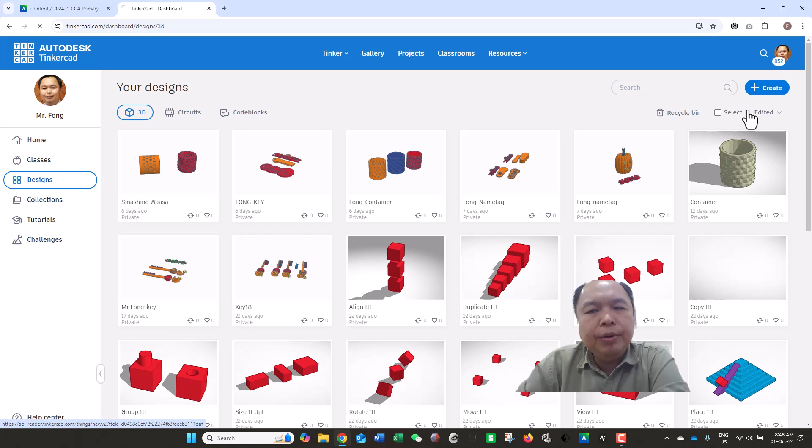Okay, so go to design, create a new 3D design. Now you can just wait for a while. I will show you with a square box. But since we are creating a box, you can use any shape you like.

For example, you can use a cylinder, or this polygon shape. Some of you may like to use a heart shape, and some of you can even create your own shape, expecting something like a flower shape, or some very interesting shape created by combining different objects.

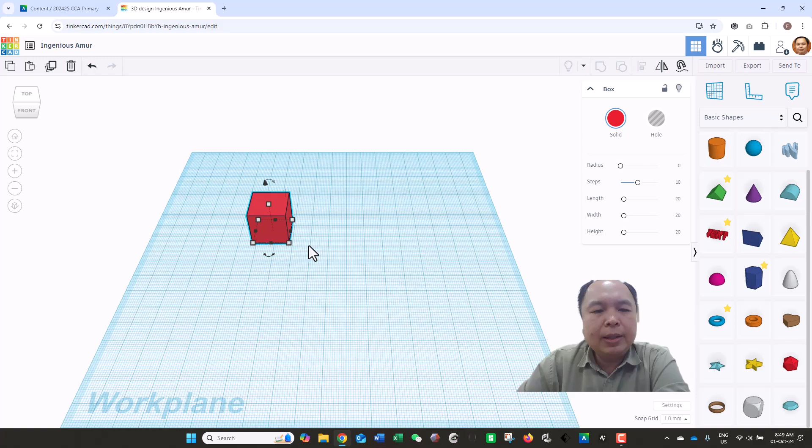Okay, how do we start? Again, you need to use shift in order to maintain the aspect ratio. You can see if you hold down the shift key, whenever you drag, the size of the box will remain the same. That means if it's 55 for all the corners, all the X, Y, and Z — you can see even the Z is also 55.

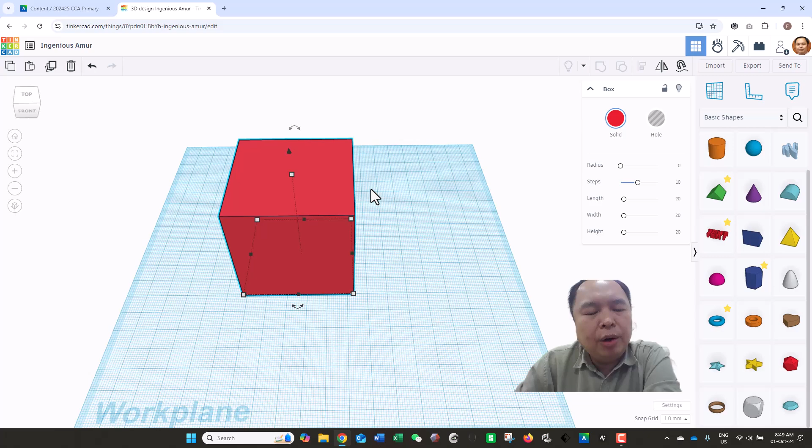I will not print a very big box for you. We'll create a small box, probably good enough to hold some coins. So you prepare maybe 60 mm, which is about 6 cm — a very small box. The objective is to learn alignment and to create a simple cover. So 55, this is fine.

You need to create an extra copy of this one because I need an extra copy for the cover. So in this case, Control D, duplicate — D for donkey. Then you create an exact duplication of this box, then lower it down to maybe about 5 or 6 mm, which is for the cover.

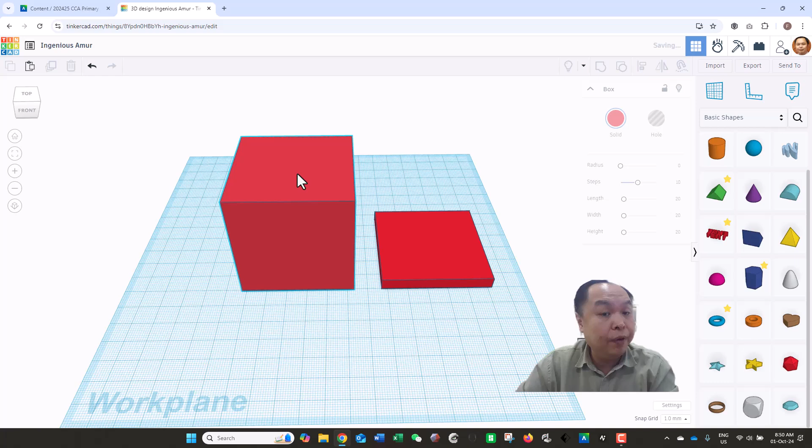Okay, for the cover. Now you select this box again, Control D if you're using a PC, Command D if you're using a Mac. Now hold down the shift key again. I want you to lower it down a little bit, maybe until 51 or 50. Let's say 50. Release, and then make it higher by holding down the fifth white color dot, which represents the height, the Z.

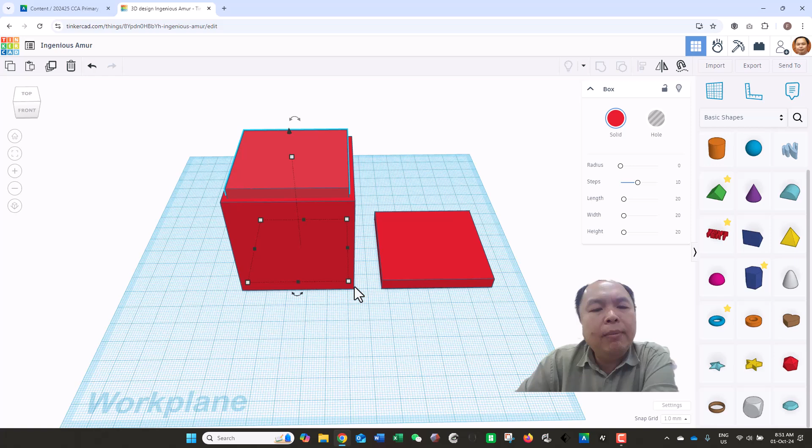After that, you need to move this up. When you move this up using the black dot, you'll notice at the bottom it shows you the gap between the work plane and your box. So 3 mm is good enough. If you want the box to be thicker, you can make it up to 4 — in case you want to put your name at the bottom. But I would suggest, why not put your name at the side?

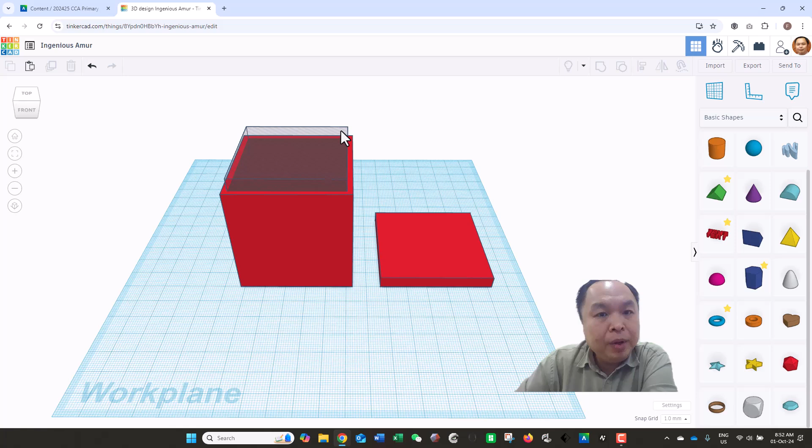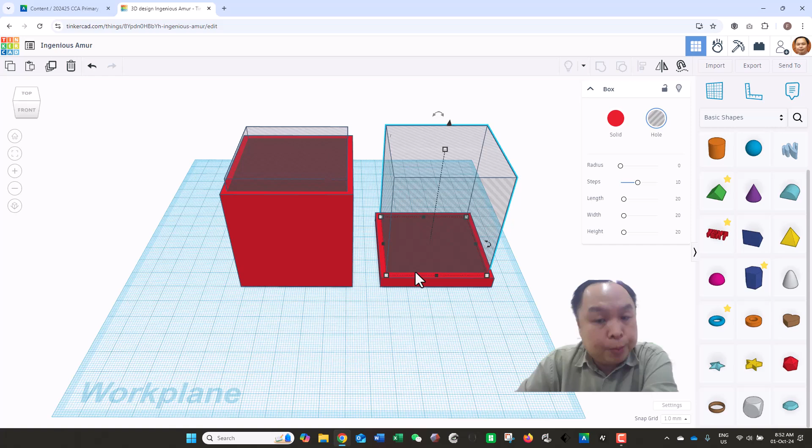Select all — now you can see we are ready to cut this box. But before that, you need to make a copy of this, the center — I would call this the hole box. Control D or Command D, bring it out. This is for you to create the gap inside your cover so that the cover can close properly. Okay, so change it back to solid.

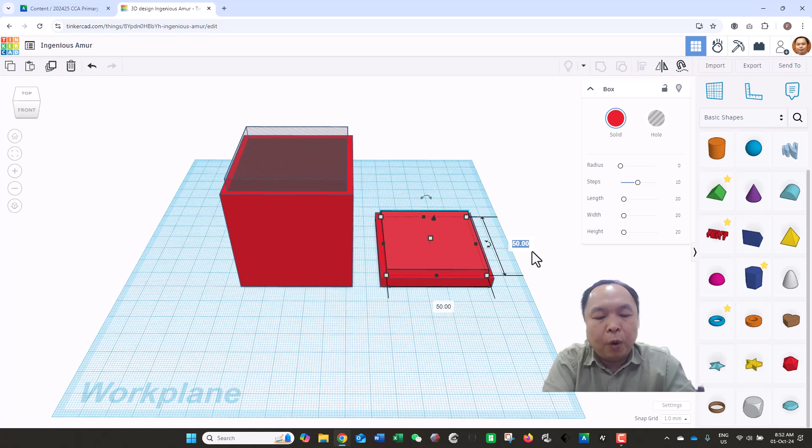Then you can adjust back a little bit — 3 or 4 mm is good enough. But you have to adjust this a little bit. First, if you just make it like this without making it smaller, your box will be very tight — it's very hard to close. So let's look at it: 50, 50, 50. Try to make it 2 mm lower by making it 48. You type 48 here, and 48 here. So it's 2 mm — that means each side you reduce by 1 mm.

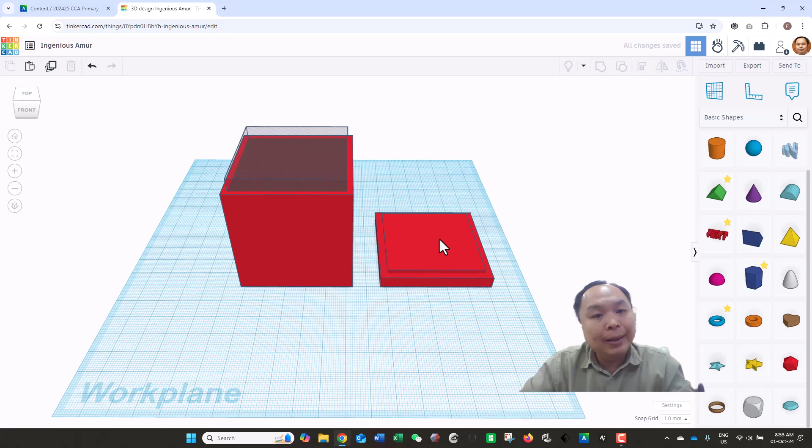Now you select these two, click alignment, center for both sides. Okay, now the cover has been done, and combine this by clicking merge. Do you notice one thing? Now the box is done. Perfect, perfect. So this is how.

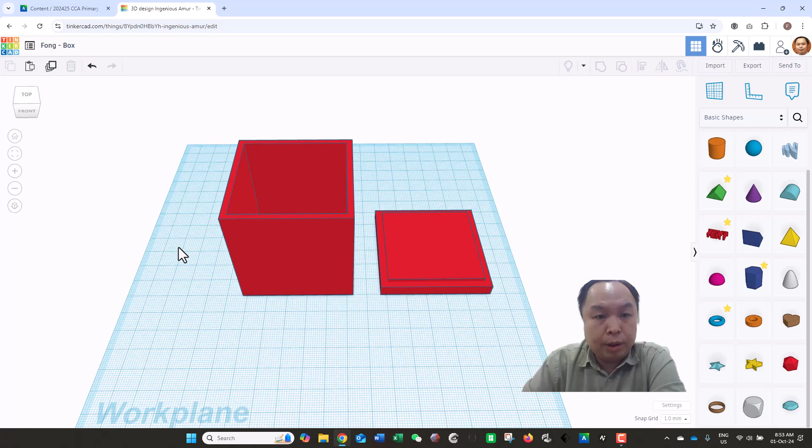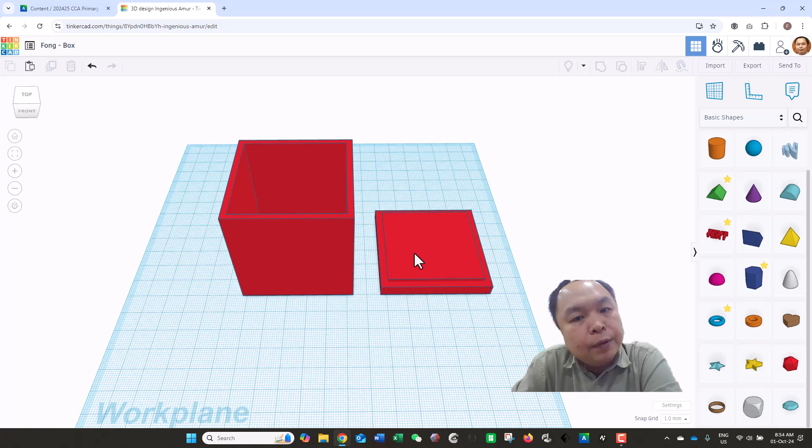Oh, before I forget, type in the name 'box.' When you submit your work, you can choose to submit in two files. Select this file, click export, so you export the selected shape. The second time you export, it will add a bracket one behind — so you can export first time and second time. Or you can also choose to export both at the same time, everything in the design as one STL file. So I will receive this submission in one file. But for good practice, I suggest you submit in two different files — one for the cover, one for the box itself. Okay, this is the simple version for everyone to try on.

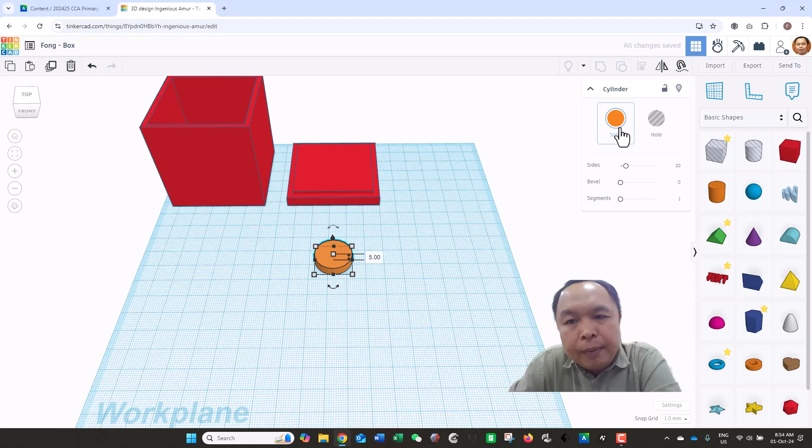And if you want a better idea, let me give you one. You can create something like this — maybe 5 mm, round, always push to the end. Now you click this one, increase the size, reduce a little bit, 4 or 5 mm. It doesn't matter how much — around 5 or 6 is also fine.

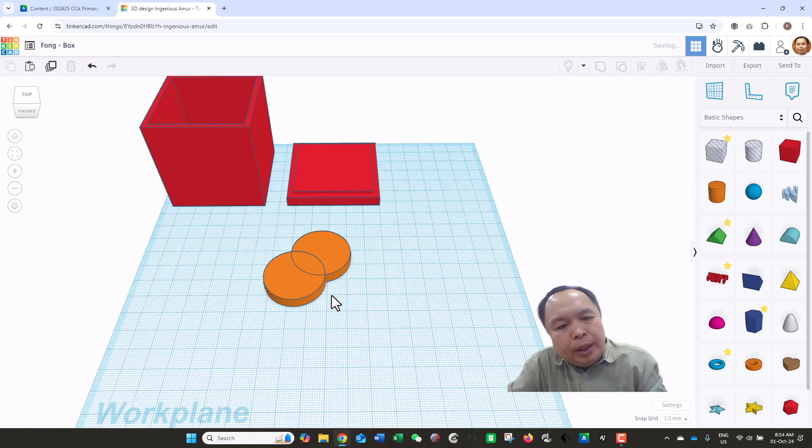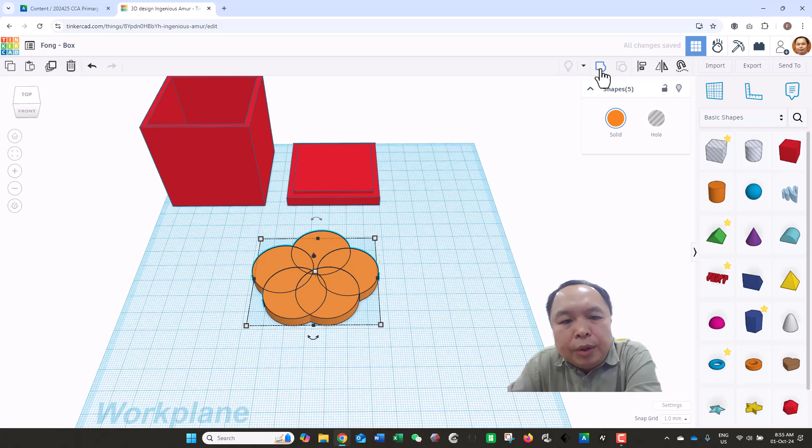Command D. Okay, and then Command D. Once you make a mistake, just press Ctrl Z. Command D again, then you can arrange something like this. Another Command D. Okay, so look at this shape after you merge together — you see it's like a flower, so you can align properly so that it looks nicer.

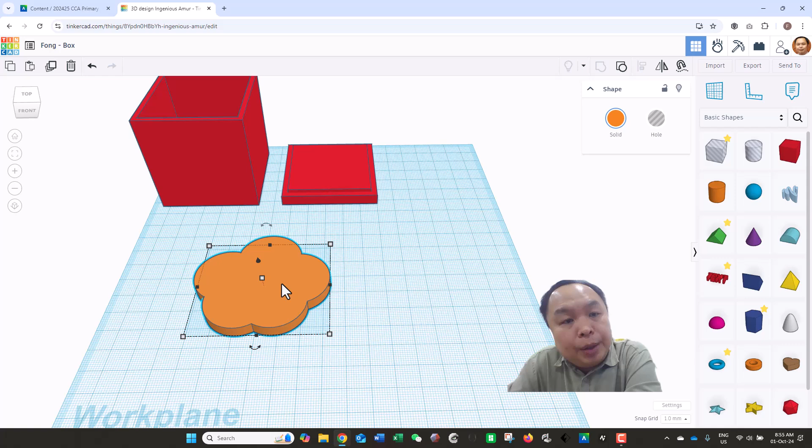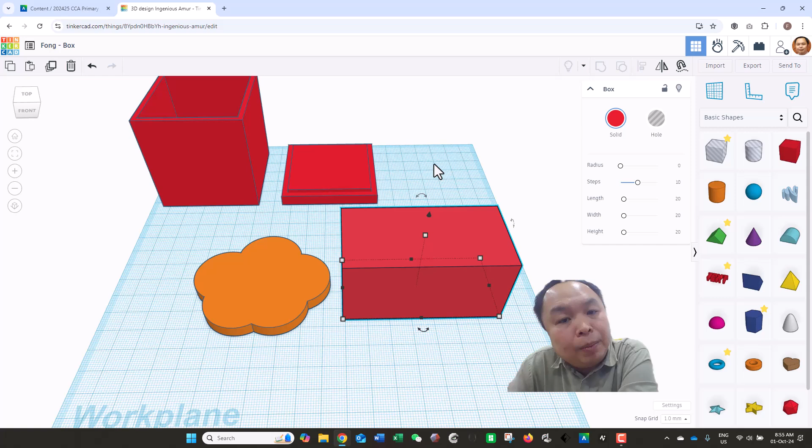You can use this to create a box with this shape. This is one idea. You can also use some other shape you like, but I would suggest using a shape that looks nice. Other than square, some of you may like to create something in a rectangular shape — something like this. Just follow the idea. Later, when you create the cover, try to reduce by 1 mm for both X and Y. So in this week's lesson I gave you another harder idea.

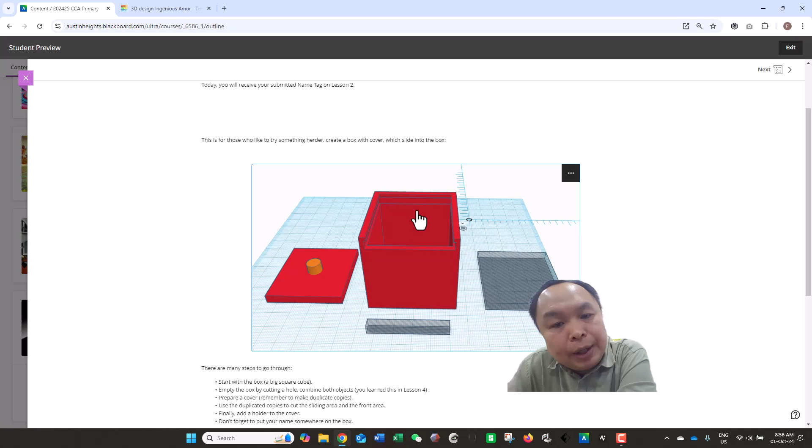For those who think this is too simple, I would like you to take this challenge by creating the sliding version. I want you to think about how you create a sliding version. If you're not very sure, you can ask me. But before you try the sliding version, try to complete this simpler version first. This is very important — you must learn how to use alignment. Okay, that's all for this lesson.